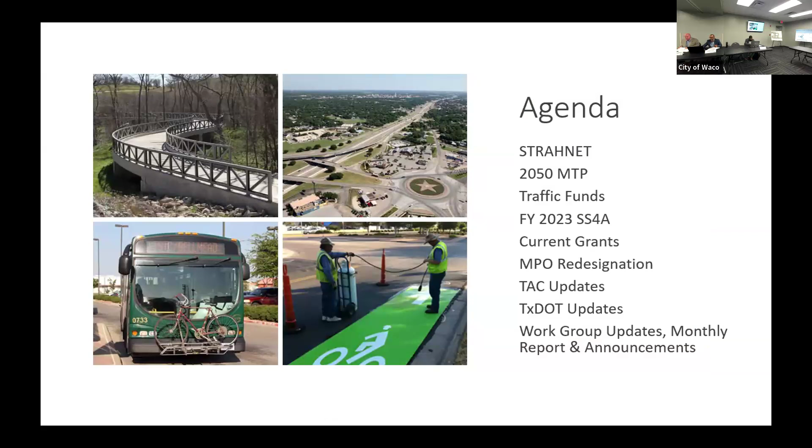Dr. Kumar: Texas Department of Transportation and Department of Defense collaborate on declaring some parts of highways, as well as any necessary roadway segments important for the power projection platform that the U.S. Department of Defense uses for moving connectivity among Army bases. In our case, the most important one is Fort Cavazos.

The two most important bases are Fort Bliss and Fort Cavazos, and the designated seaports are Port Beaumont and Port Arthur. Right now, the Department of Defense is proposing adding 17 existing roadway sections throughout Texas, 3 of which intersect or crisscross the Waco MPO area. The intention is to improve transportation infrastructure critical to military and logistical operations.

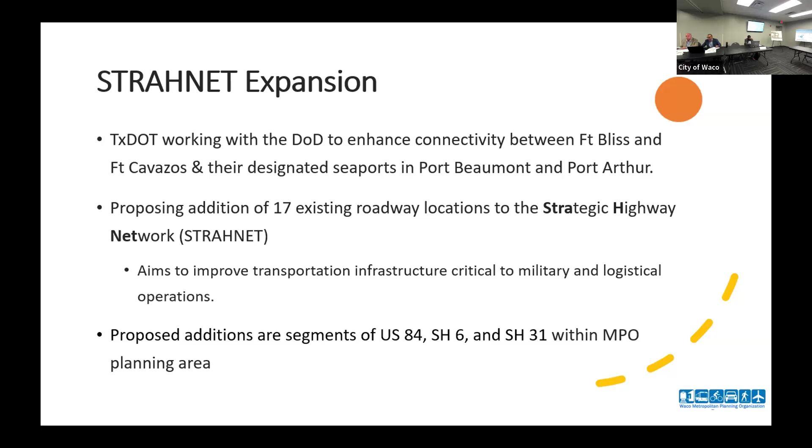This also means the design standard for these roadways must meet the specifications of the U.S. Department of Defense. What we are proposing here are the 3 segments from US 84, State Highway 6, and State Highway 31, all within the MPO planning area.

Let's go to the next slide. These are the maps of the 3 locations: US 84 from Gatesville until I-35, State Highway 6 between 84 and 35, which is the mall-to-mall project, and State Highway 31 from I-35 to I-45, a 52-mile long segment.

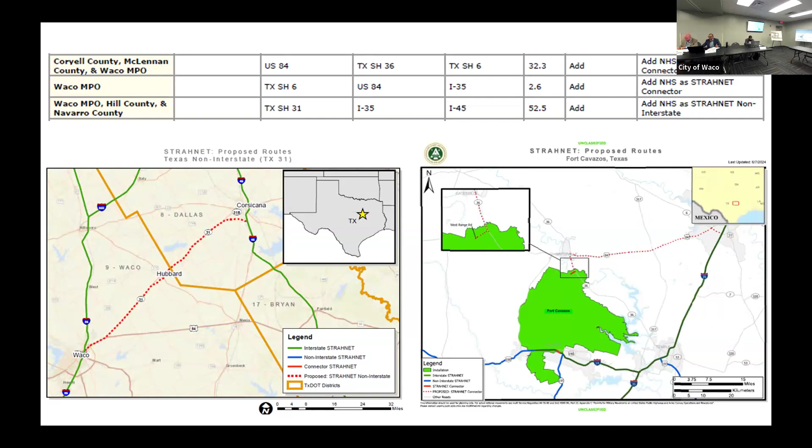These are the 3 new roadway segments that the U.S. Department of Defense has requested be added to the STRAHNET, and TxDOT has requested that each MPO policy board concur with the redesignation of these roadway segments as part of the STRAHNET. So what we're requesting is that you approve a resolution concurring and approving the addition of these existing roadway locations on the STRAHNET.

So they're going to upgrade these roads at no cost to us? Actually, the U.S. Department of Defense does not, but TxDOT will make it a much higher priority if there were any deficiencies in these areas. State DOTs typically use these designations as part of their prioritization for where to invest. So there's no real downside for us at all.

I guess this is more a Stan question - how prioritized are they? I haven't looked into this corridor specifically. We've done other corridors with Fort Cavazos, looking at safety requirements, height requirements, more than anything, so we can get their equipment through. The previous one I was involved in was looking at a 15-year time frame.

That was a different corridor for the same purpose, so it's kind of a long approach. As our projects get developed and built, we have a different set of standards we have to design to. The last audit, US 84 was reviewed by the Department of Defense about 2 years ago, and there was no major deficiency found at that point for their purposes.

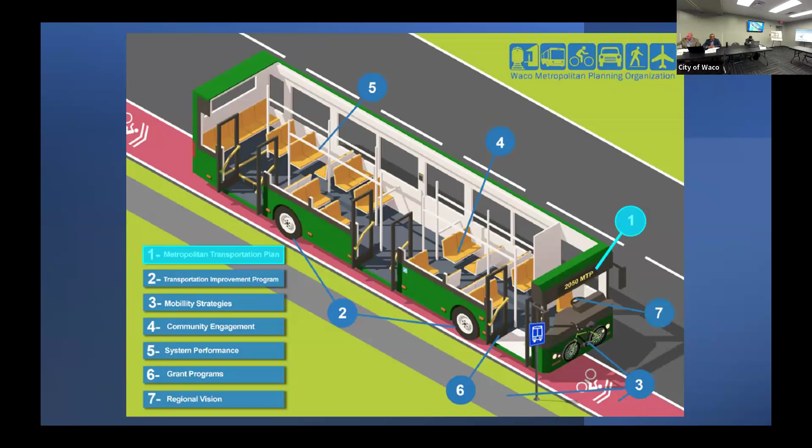This is of course our most favorite image, one that covers everything the MPO does and how it all fits together into one coherent system. The MTP is our largest umbrella document, our long-range plan, and we've been working on it since January of last year. We are in the final phases of this.

Let's go to the next slide. This is a map which some of you may not be able to see fully here, which is why we also have it on a poster, and all the projects are listed here. We'll go through each of these projects at least by name.

If you have simple questions, we can answer them, but if you'd like more detail on what the projects entail, their descriptions, and if you have additional thoughts, we will stay as long as you want. We have a long list of paper and will take notes so we can account for them as well.

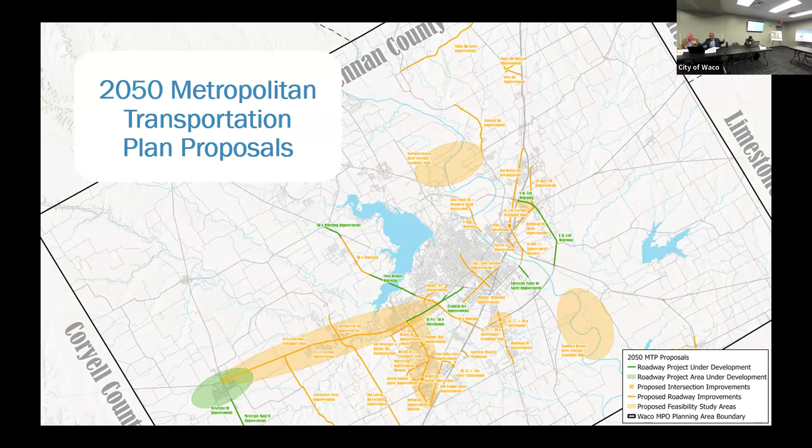In this case, you can see that's McLennan County and the projects are spread across it, except for fewer projects in the top left area and the bottom right area. That's expected, since I-35 ends up being the most important roadway segment through McLennan County, and a lot of projects sort of bisect it, which is what you're seeing in the map.

We have discussed them in the past several times; they were included and have been discussed over the last several years. But Hewitt Drive is important because, based on analysis from early this year, it is very likely that Hewitt Drive will be on the top 100 most congested roadway segments in Texas. When that happens, the TxDOT Commission typically pays strong attention to it. We're all aware how important Hewitt Drive is from a business standpoint, but also from a safety standpoint — in our comprehensive safety action plan, Hewitt Drive kept coming up as one of the important safety concerns.

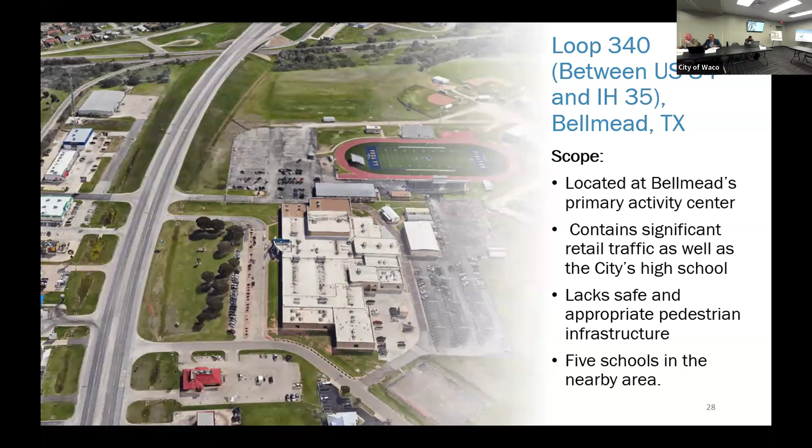Next slide. When you say students tend to use it, is that more like, say they're on the, what would you call it?

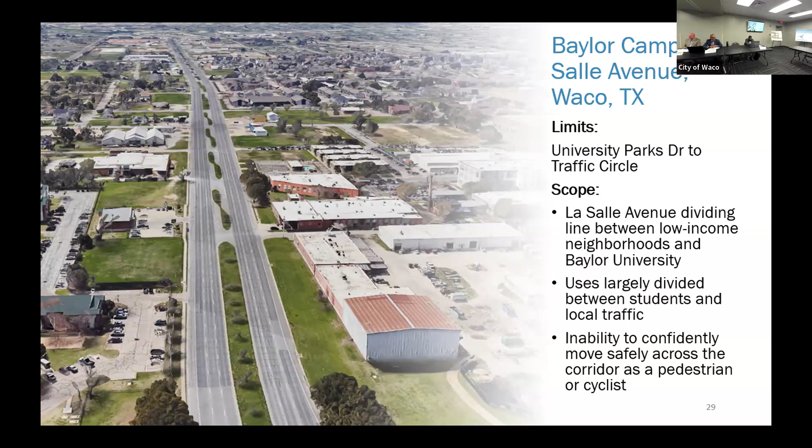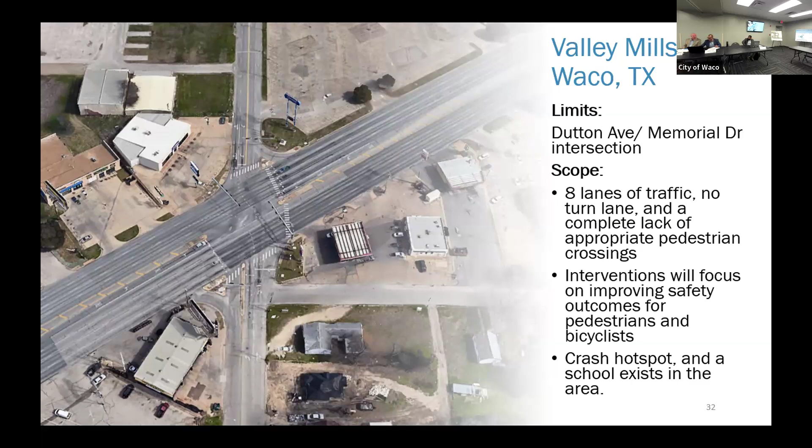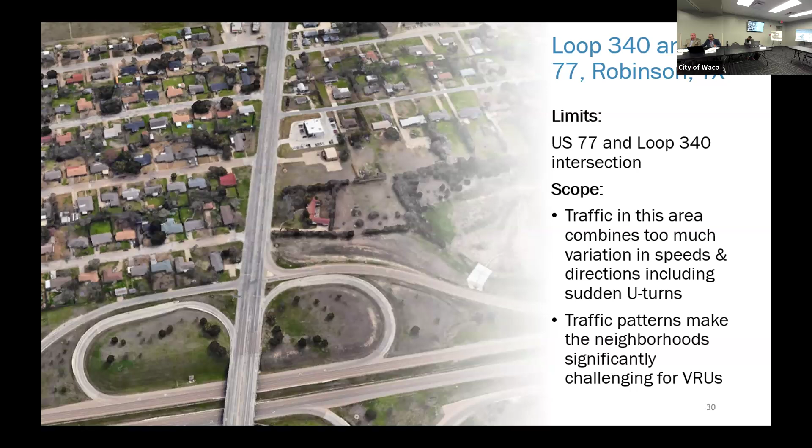However, the challenge in each of these projects is that in order for them to succeed, the private businesses where we place them have to agree to maintain and use it. Because if they don't maintain and use it, this would be a failure.

Then it would be, so we know that for sure. And that's one reason why we have not settled on any particular one. We are in some discussions with some of the locations and the Union Hall people at the moment, and we'll see where we end up.

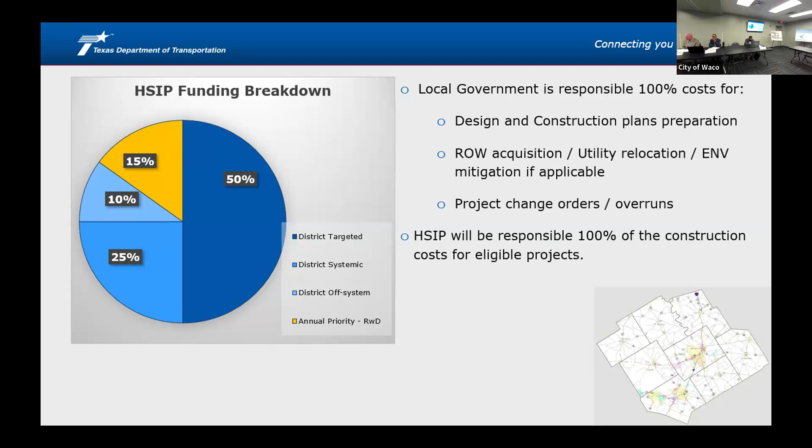Current status of the program: for fiscal year 25 and 26, all funding is allocated and all projects are already programmed. We do have a little funding available for the off-system for FY 27. We're looking for projects from local governments for the FY 28 program, meaning those projects will be let in FY 28. Unfortunately it's 2 years down the road, but there are opportunities for local governments to do upgrades.

These are examples of projects we've done in the past with local governments like the City of Waco or City of Temple: adding new traffic signals or improving traffic signals, adding pedestrian elements to intersections, and reflective backplates - those are the reflective borders installed around signal heads. Also rectangular rapid flashing beacons, pedestrian elements, concrete barriers, traffic islands, ADA ramps, and sidewalks.

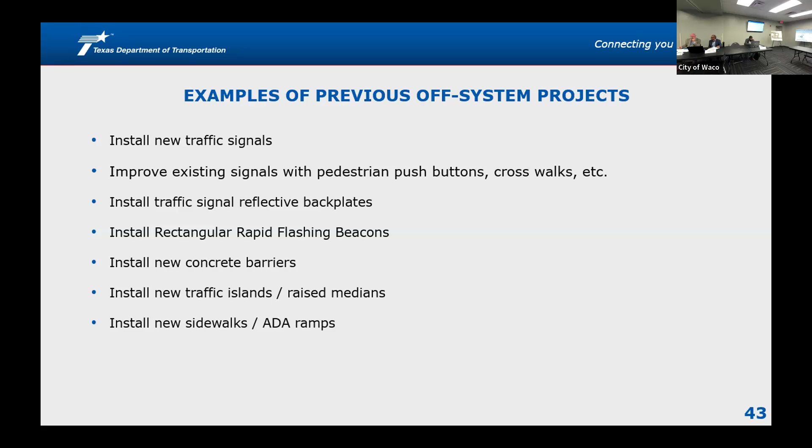All I'm looking for is locations and the scope of the project - what are you expecting to do? Improve signals, add backplates, add ADA ramps or pedestrian sidewalks, things like that. Just send the information to me and my team will run crash analysis looking at the number of crashes at that location.

We will rank the projects accordingly, and we'll also ask you to give us cost estimates for the projects - we can work with you on that too. Sometimes for smaller communities it may be a challenge to put these cost elements together, so we can help with that. The goal is to get everything ready and submit to our traffic safety division by the middle of December.

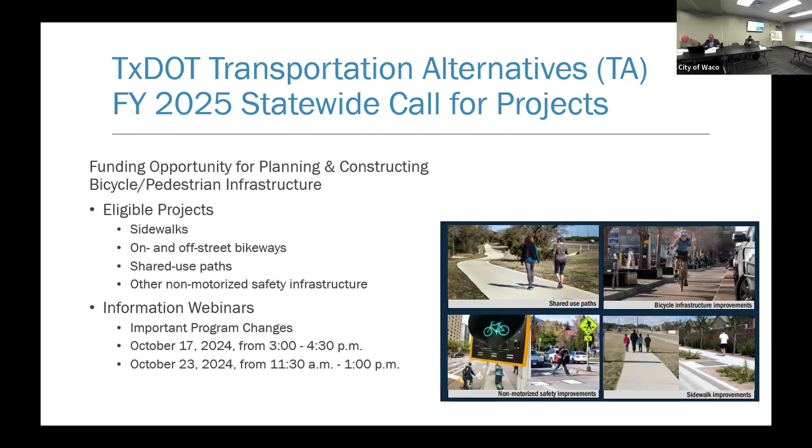Thank you, Dr. Kumar. Next item on our agenda is an update and discussion on MPO redesignation. I do not have a new update since the last meeting. We're still waiting to hear back from the governor's office. Our current planning agreement has been extended by one year, up till September 30th of 2025. This allows us time to go through the redesignation process and complete it prior to the signing of a new agreement. This is what TxDOT has done for every MPO. They will probably do a wholesale new planning agreement in the next round.

At this point, one of the thoughts we have, and we'd like more discussion on this, is that we had created a strategic planning work group in the beginning which had gone through all of these steps. Some of the major steps that had been recommended, we are coming to the point where we're about to complete them all. So it's important for us to start getting on a cycle of every 5 years where we have a strategic planning process.

What that would mean is that in early 2025, we are considering bringing the strategic planning work group together again, to lay out the strategy for the MPO for the next 5 years. In terms of timing, it would make sense to reconstitute the strategic planning work group at the end of MTP adoption, and then start looking forward to the next 5 years. So once we hear back from the governor's office, that would be the first step we are considering taking.

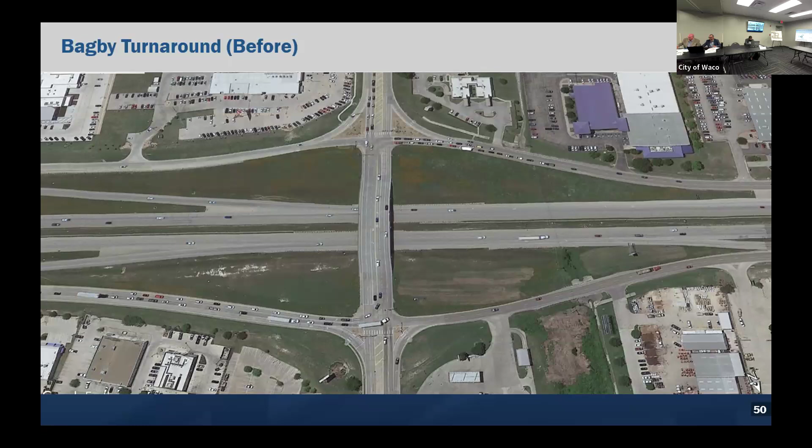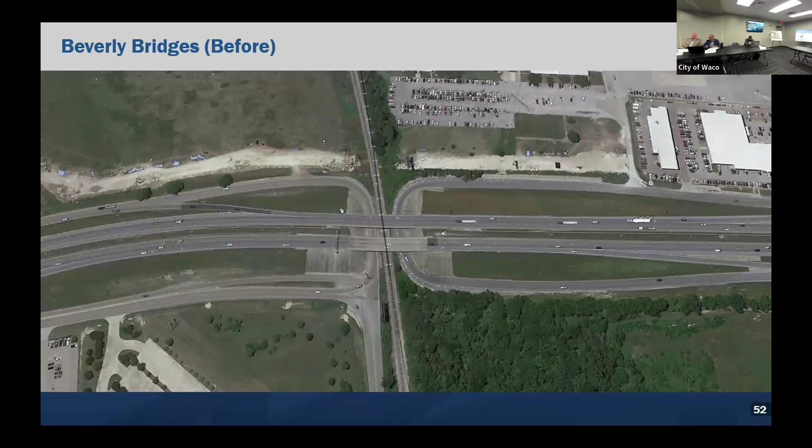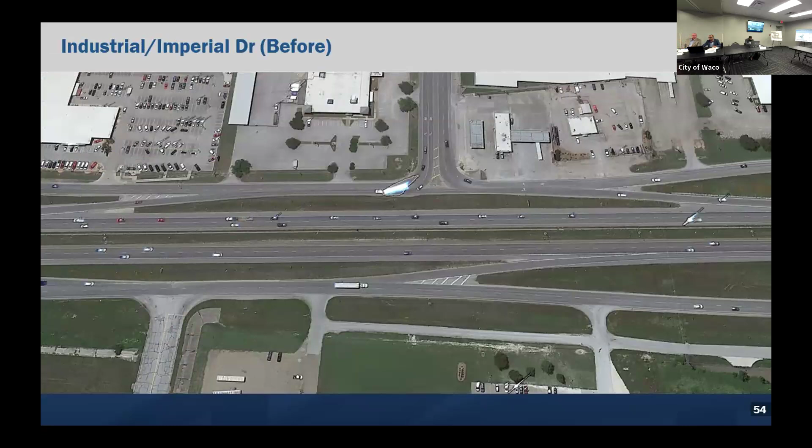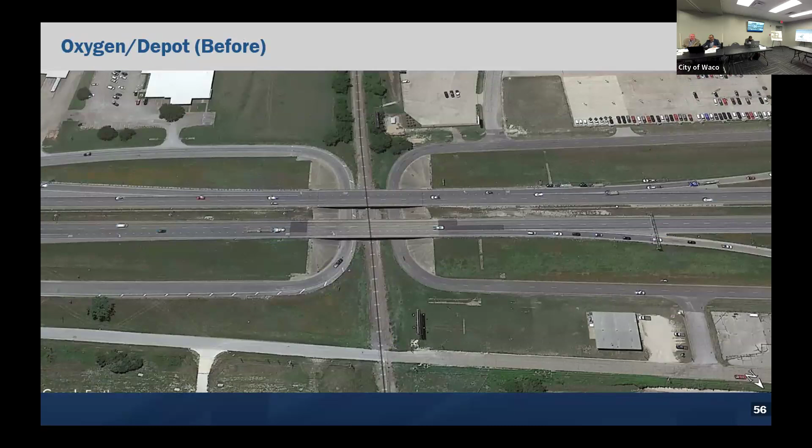Moving on here at Industrial Imperial, again you can see some of the short ramps, short weave lanes. Next slide, you see the widened main lanes in the middle, widened frontage roads, more room to move around. At Oxygen Depot, again you can see the short weaves, no frontage roads. Next slide, continuing with frontage roads, widened main lanes, longer auxiliary lanes.

This picture, I think everybody remembers this old exit to 84 and the issues that caused. Looking at this picture, I forget it was that close to the intersections, and the issues we saw with traffic backing up onto the main lanes there. Next slide, that's now gone. So those that drive this area, the exit is now back between the railroad tracks and industrial, about 3 miles back.

What is that? With that, we're wrapping up a little bit of cleanup, have a DMS structure to get commissioned, but other than that, this project is wrapped up. Thank you all so much.

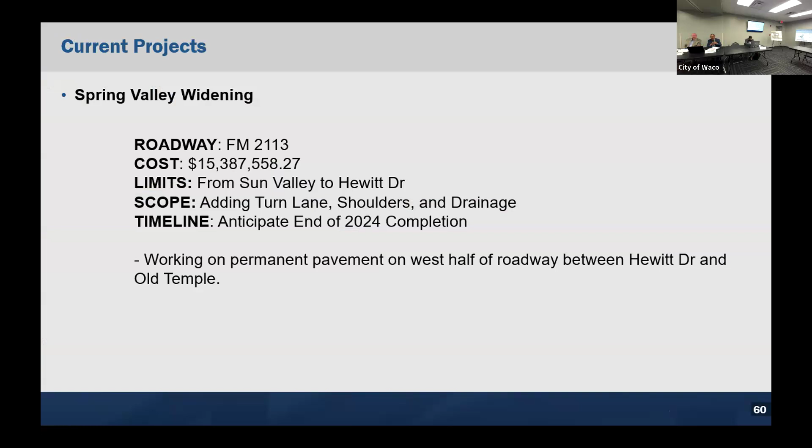I had some other pictures. This might be the one from the technical committee, but the main thing here is that between Hewitt Drive and Old Temple, we've got curb and gutter in place. All underground work is complete. Contractor is getting flex base finished out. Should start paving operations at the beginning of November, and get that roadway opened up again by the end of the year.

Our U Parks widening is another one that will wrap up at the end of this calendar year. Just this week, we poured the second half of the bridge at Primrose Creek, and started our paving operations there at the approach on either side of the bridge. Next week, we'll start our final surface of pavement there. The remaining work will really be focused on the intersection of La Salle, getting those signals up and operational.

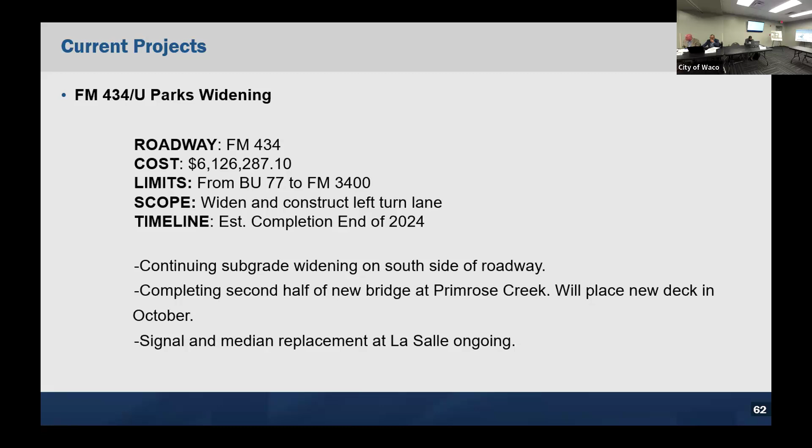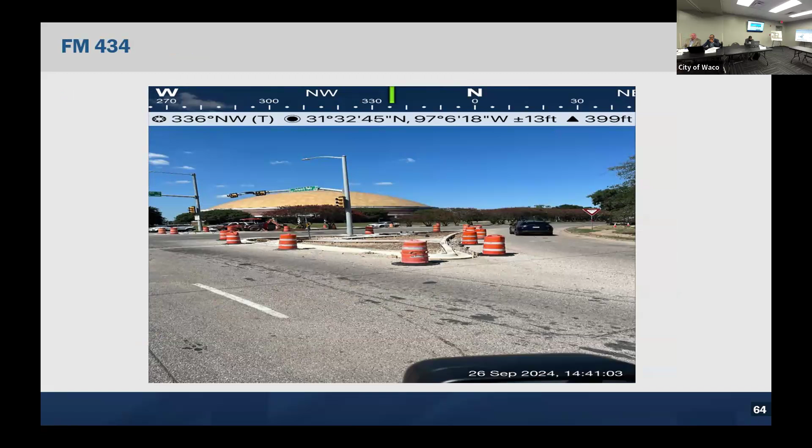So the bridge structure at Primrose Creek now has a bridge deck placed on it as of this week. And up in the intersection, the bulk of the island work is done. I'm working on some electrical details with the city and Oncor right now. I think we should have that one wrapped up towards the end of the year.

31 and 2311, this is a project that's really started up since the last time I was here to present. This is constructing an overpass, 31 up and over 2311, so a mirror image of what happened at 939. Along with this, we are also rehabbing and widening 2311 from 31 to 308 up in Leroy. We're looking at a 2.5 to 3 year project there.

The big thing to note is sometime next spring, we're looking at approximately an 8-month closure, full closure of 2311, and that's to reconstruct 2 of our bridges there over the creek crossing. So we'll get some word out before that actually happens.

Next picture, the bulk of the work is really for the westbound frontage road on the north side of 31 right now. Contractor already has flex base up and running there, and then in the wide median of 31 is working on the embankment for the new bridge headers for the new overpass bridges.

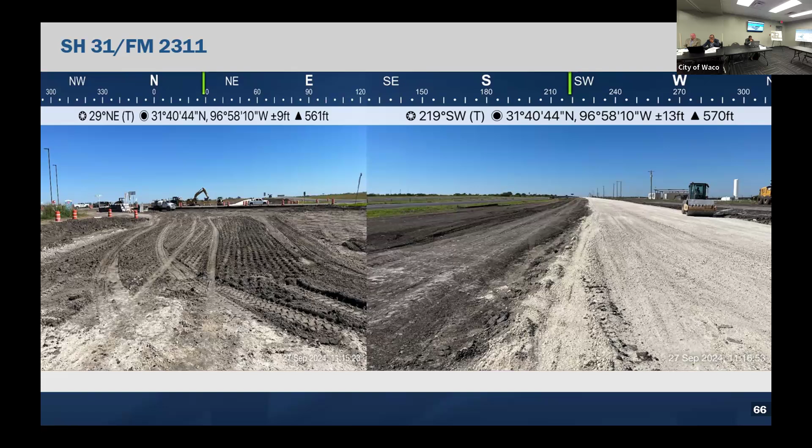And just some updates on smaller projects. The top one, our State Highway 6 Mill and Inlay - all the work in McLennan County is complete. They're down closer to the Robertson County line now, actually working on this one. Looking at the end of this year to have paving operations wrapped up.

Our Bellmead Drive, the Loop 340 overlay - paving is actually completed there, working on a little bit of punch list and cleanup. And then our Business 77 bridge demo at the Fox Interchange, 77 and 84 - the old structure is gone, roadways in final configuration. Again, just a little bit of final cleanup there, but that project is also wrapped up.

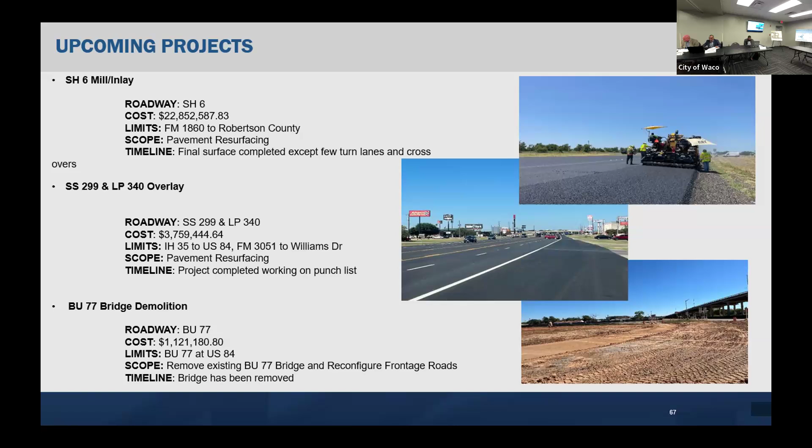Next item on the agenda is work group updates. We do not have any new work group update. You heard from the bike ped work group. Our next meeting is going to be for the bike ped work group on November 20th. We're finalizing the white paper for the connected automated vehicle, and so they will not meet until January 15th.

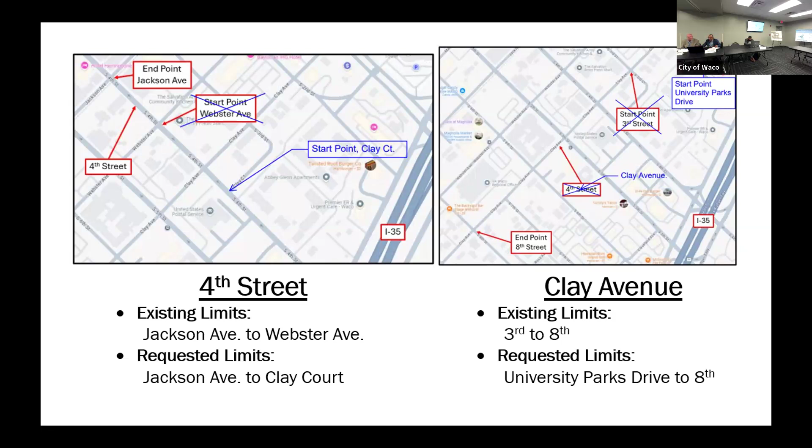We've had a tremendous response so far. A lot of people have sent us information, and they're super excited to be there. If any of you would like to join, that would be great. Next Wednesday at 5 o'clock, we're meeting at Brotherwell Brewery, and hopefully several of us will bring our bikes and go for a bike ride as part of this discussion.

Are we to characterize this genre-wise, is this a murder mystery? I don't know, but it could be confused with drinking and driving. I don't know, so you gotta watch out for BWI at this event—yeah, biking while intoxicated. Hey, don't mess up the ratio and the numbers in District 1.